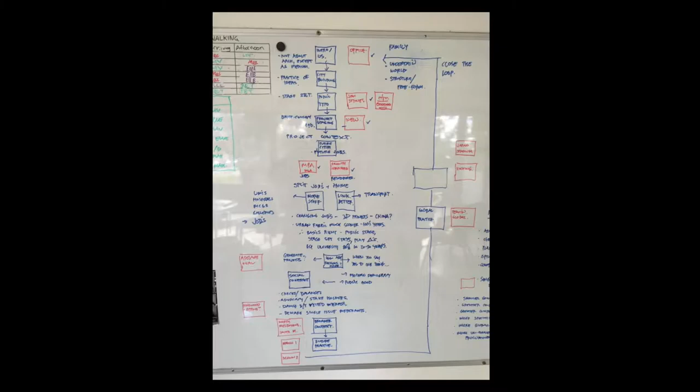One thing I wasn't going to show you, but one of my kids said to me on the weekend, Dad, you should show them that when you do the lecture. Just to prove it, we do actually sometimes prepare before we give a lecture or a conversation. So this is the structure I did on the whiteboard at home about what I was hoping to say, what I was trying to get across, and some of the evidence that we could produce. So we sometimes do put a little bit of work into how we structure things.

So I'll just step back a little bit about our practice and why we do the things we do. I don't think anyone will accuse us of having a style. We don't have a house style at Cox. We don't have lots of yellow sticks or whatever that identifies our work. But strangely enough, over time, you can start to see the clues of the philosophy behind it.

And that's my overarching message tonight: if you don't have a north point and a philosophical position, how can you continue to deal with such a constantly changing world and so many inputs that all architects are exposed to in the course of any particular project?

So the two main drivers that we like to focus on as a practice are about typological evolution, and we focus very heavily on doing different sorts of public building types. So we do convention centres, we do schools and universities, we do hospitals, we do stadiums, we do public work.

Railway stations in particular is a favourite topic of ours because it's actually a really great public events platform. And what we try and do is move them into the next realm. I'm not that interested in what the last railway station or the last convention centre was doing. What I really want to look at is what the next one's doing. So to evolve the type and to start to hybridise the type.

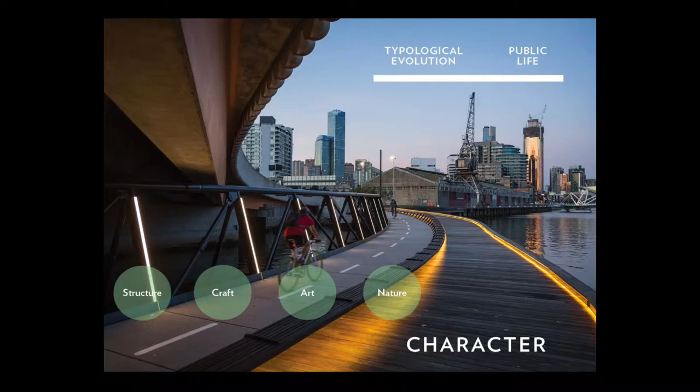We've got some more sort of complicated ways in which we describe that in terms of where is our north point, what is our ethos, what are our projects, how have we evolved them, and what are the processes that we do. But it's all driving towards what is a future city and how do they come together. And what's our role within that future city? Because we can't delude ourselves that the architect is someone all-powerful with a pen. But we are in a strangely influential position to start to influence the pressures that start to come upon how a city is put together.

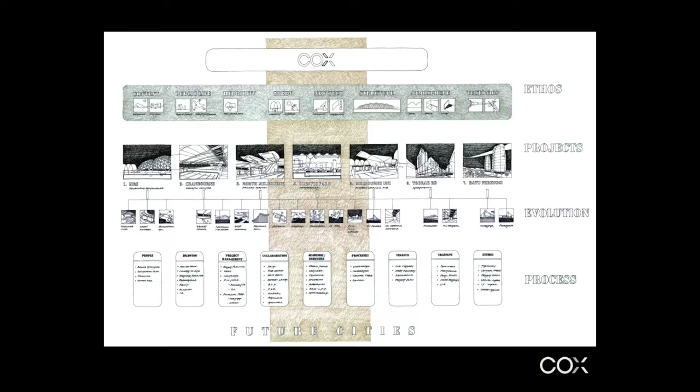Now, I presume you've all done enough of your professional practice to talk about the stages of the project. You know, there's the briefing stage, concept design, and all this sort of stuff. And this is all pretty conventional stuff. Interestingly enough, it's never quite the same for every project. So every project we do in some ways is a prototype of process as well as a prototype of project.

But one of the things I'd like to talk a little bit about today is what happens before the briefing. So public architecture for us is about what happens before the question is asked. How do you frame the question, how do you start to be involved in the debate about the question from which a brief, from which a project will come? So you have to go further back in sort of root cause analysis to really understand how public architecture comes about and what influence we can have on that. Because sometimes the influence can be well before a brief has come out. So we do need to start working our way through that.

And if you do want to start talking about future cities, you actually need to understand them at a demographic, a geographic and an economic level. We can get very tied up in our solutions, our answers, but in fact, we sometimes forget to look at the question that we're asking. So if you'd like to look at where future cities are going, you need to find out where the future jobs are. And that's not an easy question to answer. But if we don't understand where our future employment, where our future economic activity is going, everything else is just wallpaper.

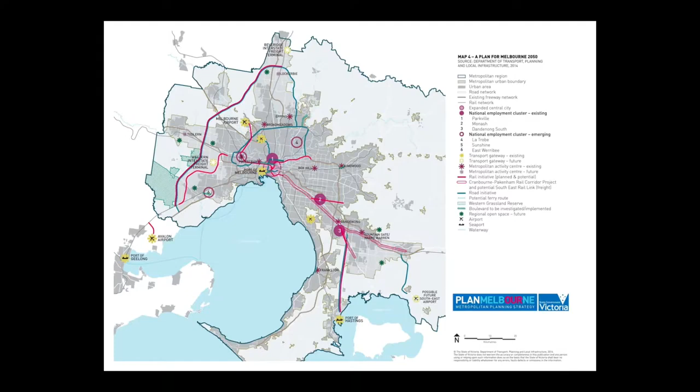So while that's all really good, what we've also done in the last 30 years in Melbourne in particular is that we've dislocated where our housing is from where our jobs will be. And it gives us an enormous problem as a city. Now, Melbourne's not unique in this, and in some ways we've got easy solutions to this problem in some cities in the world.

But the fact is that if you look at where the future growth will be from, over the next period of years, and all this stuff's on plan, it will start to show where our residential components are coming, and they're separated from where the jobs are. They're separated from where the majority of our schools are, and from where the majority of our health services, our sporting facilities. So what does that mean?

What it means is that it's a bugger to drive down to Geelong from Melbourne at this time in the evening because of the traffic. But it's a bugger driving around Melbourne, and it's a bugger driving back to Melbourne. The infrastructure that we have can't support the dislocation that we've created between where our jobs are, where our education is, and where we reside.

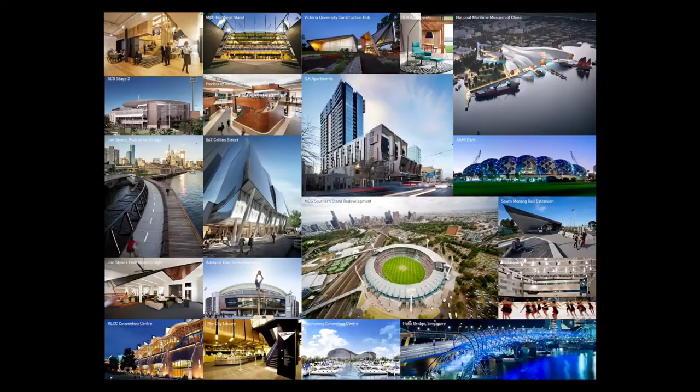So there's suddenly massive amounts of more vehicle movement per person than there ever has been before. And that creates some issues for us. And as far as we can see, that really starts to talk about two possible outcomes. The first possible outcome is build more stuff. All right, let's build more stuff where the people are. But it's such low density. How can you do that?

How can we support 5 MCGs in Melbourne? How can we support 5 medical research centres? We're supporting 2 potentially. Pretty hard to support 5. What do we do about all of the issues to do with universities? So the things that we need as a city can't actually be continued to be replicated. The city doesn't have enough critical mass and it doesn't have enough wealth.

So when you're an architect and being asked to design a public building, what you're being given is an extraordinary privilege. A society, and every culture in history has its own ways of disseminating this, but when a society says we wish to build something, and it might be a hospital, it might be a railway station, it might be whatever it is, it actually is also saying, therefore we won't build something else.

So every time you do something, it needs to work as hard as it can, and it means that there's some real onus upon the designers to make sure that we get it right. So the idea of building more is good, but it's actually not possible to build enough. The other answer, of course, is to build better transport links between them. Now, I think we've almost hit the end of the road.

Roads are very useful, we've got them, but every time we build more roads, I feel like we've got cars as quick as a wink. So how do we do that? And so one of the reasons that we love rail transport in particular is that we think that the stations themselves become a very important part of the link.

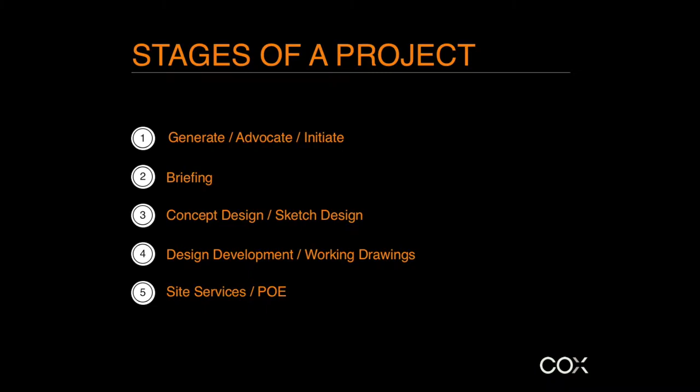And we got a knock on the door in 2006 from a chap who said, "Oh, look, I'm from the Adelaide Oval and got a meeting next week, and I don't think it's going to go very well, but it might go really well, and if it does, you'll never see me again. But if it doesn't go well, can you be my plan B?" We said, "Oh, okay, that sounds good." So we got a phone call a week later saying, "Oh, look, can you be our plan B?"

And we came to the conclusion that it was actually one of the prettiest places in the world. Unfortunately, it wasn't the architecture that was pretty. In fact, we had to point out, standing in the middle of it, that actually it was a pretty damned ordinary place, really. The delight was between the stands, the delight was the connections, the delight was its context, not what frankly was a fairly ordinary series of things around it.

So we then went through a process, and I'll go through this relatively quickly because this is a conventional public commission. We've been asked to get involved, we've gone there, we've made some comments, they'd said, "Oh, that sounds interesting, what can you do for us?" And so we got literal with the things that we felt were very important. What made that place Adelaide, not Perth or Melbourne or Los Angeles or Dusseldorf. There's something about that. And so we then ended up moving into what we called the Western Stand project.

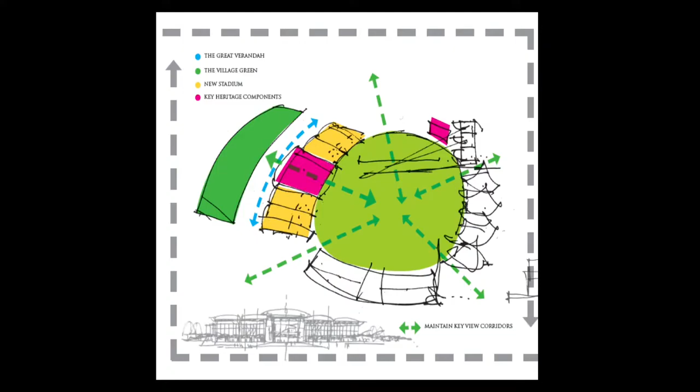And we looked at the ideas of pavilions. Pavilions were very important. And again, we talked about the Great Verandah, the Grand Promenade, the atrium, and evolving the structure of the ground itself and of the buildings. The pavilion really was the idea that there was a hierarchy. It wasn't a stadium. There were ideas of pavilions having gaps between them in the park. So you can start to see some of the early sketches about how what had been the Western Stand could change into a pavilionised structure that really has a centrepiece with some hierarchy.

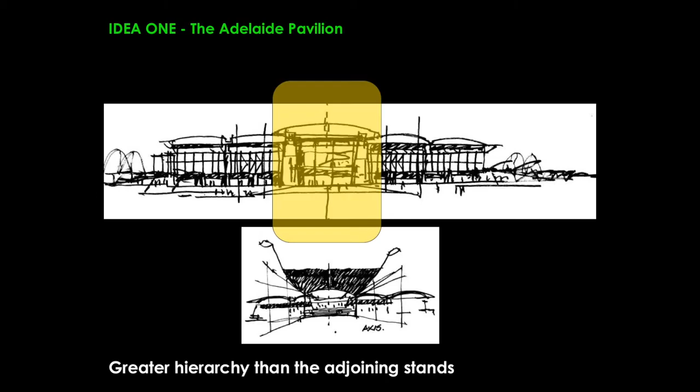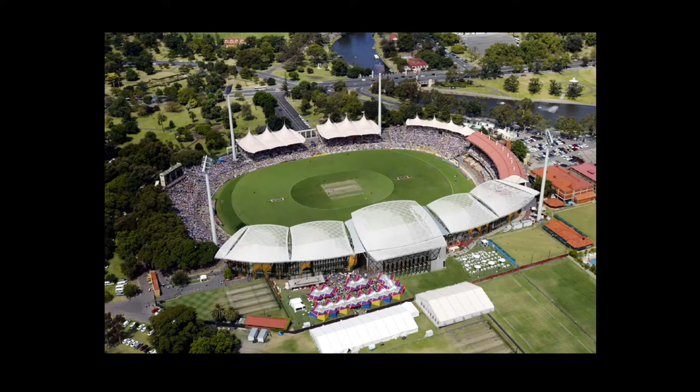The veranda being a place where, in Adelaide, in cricket, it gets bloody hot, 40 degrees. You don't want to sit in the sun. The idea of the veranda being something that is able to mediate between inside and outside in an environmental sense, but also being the stage set where that social act happens, and so we line the outside edges of the buildings with veranda. And again, the idea of shades, moving fans and so forth. Looking at the vaults that existed there.

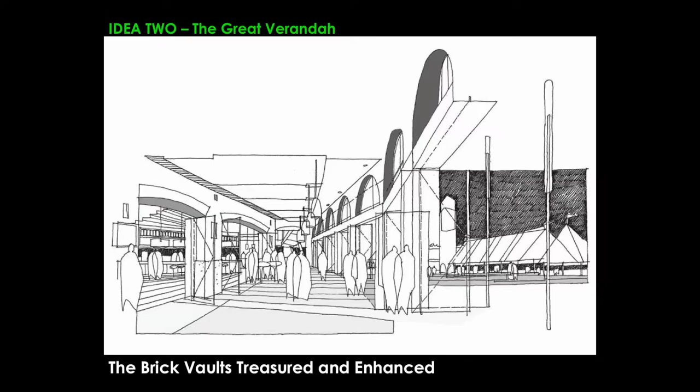The Grand Promenade, something we'd never seen before actually, which is that because of the history of the ground, there's actually a promenade that you can walk around here.

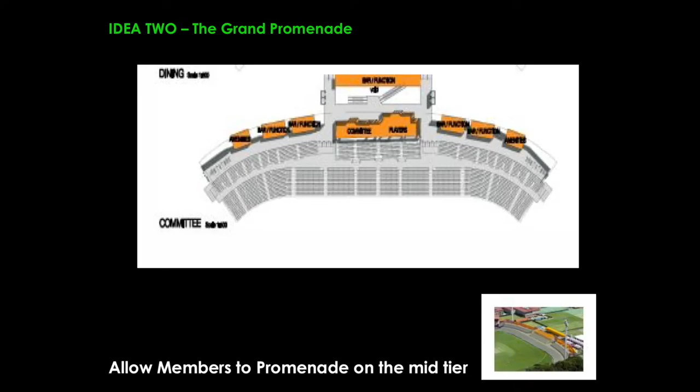And what happens is that there's 30,000 people come into a stand that only had 10,000 seats, and all had a lovely time and had a party in the back, a bit like at Flemington racecourse, you know, have a party in the car park, never see a horse. And what people would do is they'd do the odd circuit through here, and they'd see all their mates and they'd make a time and a place to meet each other in the course of a day.

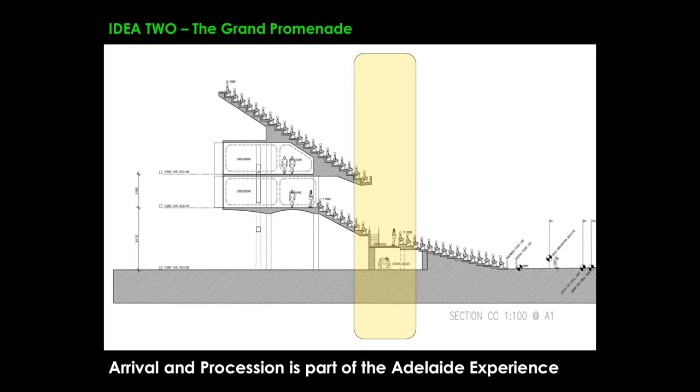So it's actually quite a special thing to do. So you've got to understand the social structures of it. And so we continue to let that occur. And the atrium itself really was about trying to provide that sort of mediated sense in the middle and through here that looked after the old building and also put forward a position.

So that was the Western stand, and you're thinking, oh, that's pretty conventional. You know, it was a lovely thing. It took us around 3 years, I suppose, between the front and the end. And we're very happy with the outcome. But then things started to change.

And is anyone here from Adelaide? You've lived there? Yeah. How long for? Went to high school and uni. Right. There, and a few years after that, so probably at least 11 years. 11 or 12. How do footy and cricket get on? Sorry? How does football and cricket get on?

They don't. No, exactly. So what happened in Adelaide was football and cricket hate each other's guts. It's hard to imagine from this distance, but it's the Hatfields and the McCoys. There's reasons for it, and frankly, probably quite good reasons, but I won't say more because of defamation laws. But football had been kicked out of the Adelaide Oval 40 years ago, and they'd been fighting each other ever since. And they had carefully built themselves a pretty dismal place out at West Lakes called Football Park, and the Adelaide Oval stayed home of cricket.

And they had been caught as a city, not clever. You've got 2 decaying venues, you've got 2 declining audience participations. Even the mad South Australians have finally got sick of going out to Football Park. The attendances were beginning to plummet. They sold plenty of memberships, but no one would want to go there because it took an hour in the car and it was crappy when you were there. Spend an hour in the car park trying to get out of the place again.

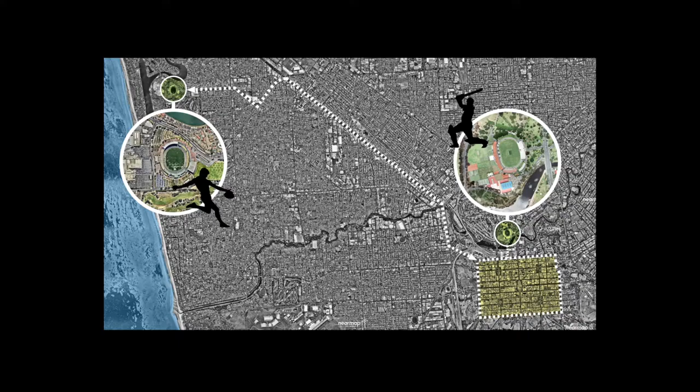And the Adelaide Oval itself was delightful in its gaps, but decaying around its space. And again, 20 people would come to a Shield match. It's not exactly right. So the smart thing for a city to do is actually to combine them together, just like the MCG does. But we've found it very difficult to do that. And so in terms of how does a city go about doing that, neither of the heads of those 2 particular codes could be seen to be talking with each other because that would be seen to be a betrayal.

And so we ended up getting a black commission, if you like, where we had to see whether or not we could get 50,000 people around the Adelaide Oval and not ruin the ground. That was literally the one-liner commission. And so we did a black ops operation to see whether or not we could do that and whether or not it was possible to keep the integrity of the Adelaide Oval intact while we beefed its population up to about 50,000, which is the same as Edinburgh.

And we ended up having secret meetings at airports. Literally, people weren't allowed to fly into particular towns. We ended up with a meeting with the South Australian Premier and Treasurer in an office in Melbourne because they didn't want to be seen in South Australia to be talking about this with anyone. And it actually happened. But it took a lot of time and it took an enormous amount of effort relative to having to get football and cricket both to approve that.

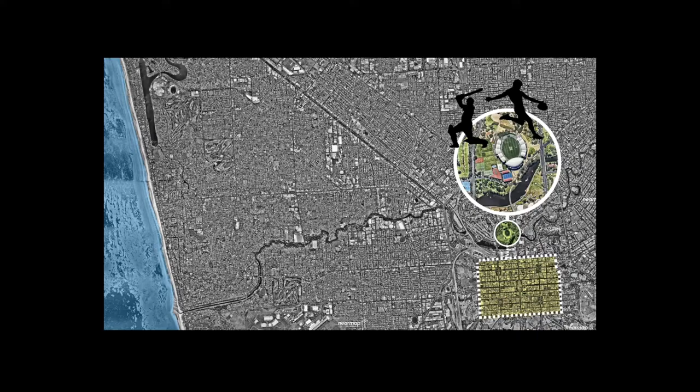So we would do things such as go on 1-week road trips through rural South Australia, presenting 3 times a day at the local cricket club, at the local pub, lunchtime at the bowls club, to all of the members, because we had to get more than 75% of the members to vote in favour of it to occur. And we got that. We got 80%, which I didn't think we were going to get. Idi Amin didn't get a vote like that when he was rigging the election. So it was actually fantastic to be able to do that. And what it's meant is that the reason it got up is that we were able to advocate for a better city as a result.

And if anyone's been to Adelaide since the Adelaide Oval was finished, it has had a transformational impact on the city. And it's not because of the architecture. I mean, we like to kid ourselves about it, of course, but I actually think it's because it's about the urban context, the fabric and the belief of the city. Of course, you build the world's best event precinct, 5 minutes walk across a bridge from the main railway station in the city, in the middle of a beautiful parkland with all sorts of shops and laneways and so forth. It's great. The city comes alive.

And so instead of getting to the ground being a real problem like it was at Football Park, what happens now is that the football clubs all have emissaries out at the railway stations. So when you get to your Gawler railway station, there's already flags and people are handing out and selling footy records. The game has started. You come into town. You can stay there afterwards. Perhaps you take someone who doesn't want to go to footy and they go and see a movie. You catch up and have dinner afterwards. So it's actually changed the way in which people attend those events.

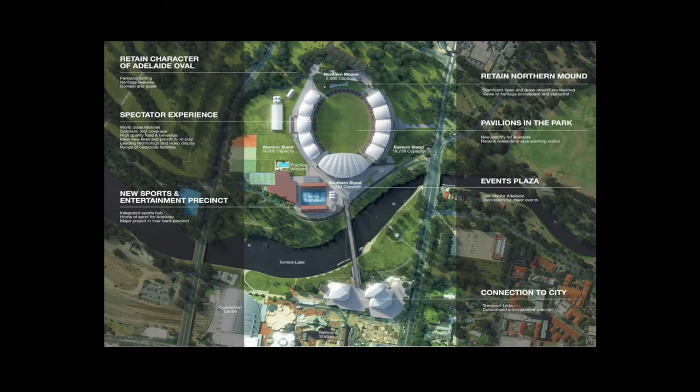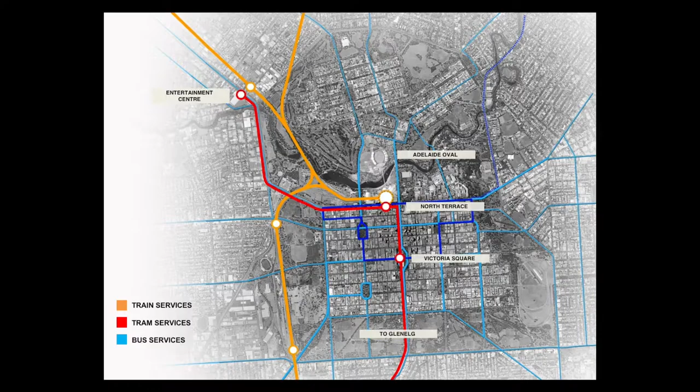But what's even more important is that it's changed South Australians' view of public transport. Hey, getting the train to the footy on Saturday was pretty good. I might catch it to work. So it's actually transformed the attendance of public transport within South Australia. And so, look, I'll very quickly go through. You guys can probably see this quicker than I can describe it: where would you put a 50,000 seat venue in South Australia? Funnily enough, you'd put it within 500 metres of the best public transport in South Australia. Of course you would. You wouldn't build it out in the boondocks. You'd put it where the transport is.

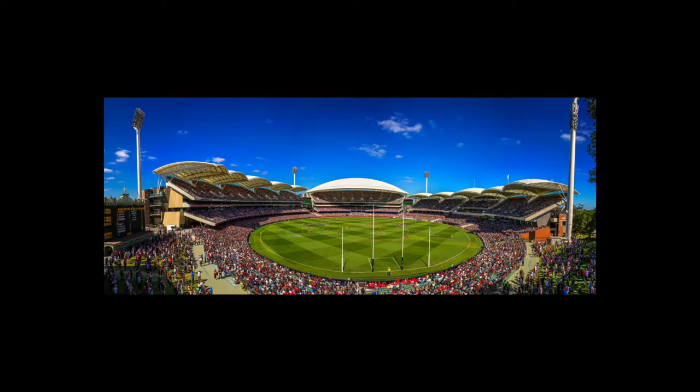You'd make sure it was uniquely South Australian. You would make sure you retained the positions of the critical components of the ground itself. Everyone loves the North Mound and the Moreton Bay Figs. Well, we gave them more North Mound back. That's an important thing to do. The heritage scoreboard has been enhanced. And the idea that there's now a series of pavilions still around the park actually works quite well. And so, for some reason, it just goes off.

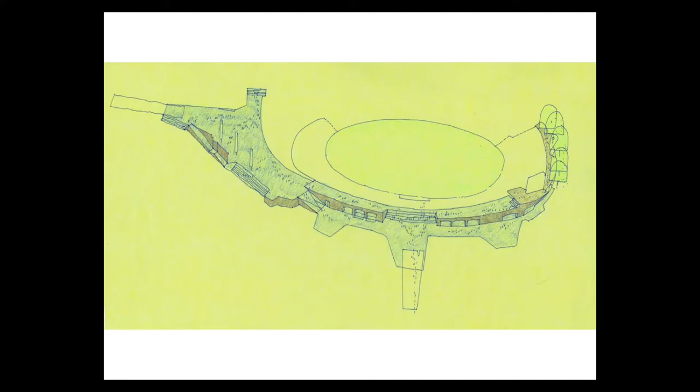So public architecture is not about the assemblage of the architecture. That's a skill that we all should develop, and we will continue to develop. But you need to try and understand the things that drive it. So our ability to turn it from a Western stand into the Adelaide Oval really comes down to the ability to draw, the idea of making place, ground plane. It's not just a stand, it's a whole series of places that people can go and inhabit. The idea of those delightful sails and the pavilions over the top of them, and it works really well. You can now have drinks among the Moreton Bay Figs.

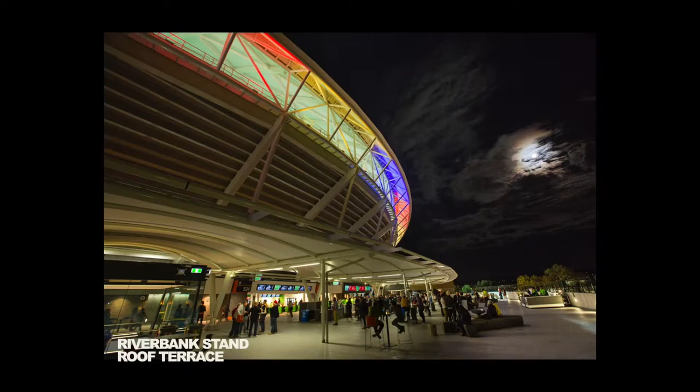The arrival into it from the Riverbank Plaza. There's a roof terrace up there. We argued for a roof terrace. No one understood the roof terrace. It's a public dining room. We managed to convince them to spend the money on a concrete paved area instead of a tin roof above the dining room. It took people 3 days of the first test match to work out that it was there, and it sold beer. And so they ended up with a real problem halfway through the third day where it had hit capacity.

They were about to be in breach of their building approval because there were too many people there. And I said, we've got to shut it down. This is a disaster. And this was very clever, one guy who was working on the bar said, don't shut it down, just reverse the escalators. And they did. And suddenly it was able to be managed. And they sold more beer there that day than they have ever sold underneath the scoreboard, and the bar under the scoreboard traditionally has been South Australia's best-selling pub.

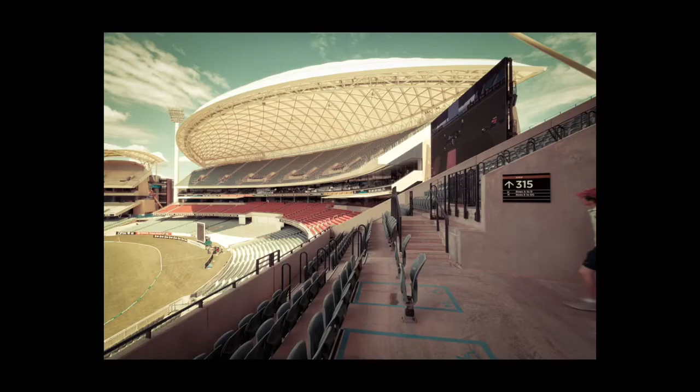And so the idea that there are particular rooms that overlook, for example, like this cathedral room that really sort of honours that view, how people come in. The purpose of today is not to bang on about the ideas per se, but the Mayor of Adelaide's there. But the idea that there's a whole series of spaces which you can occupy, you can come together tribally. This is an image that was sent to us from someone. So people are sending us their favourite photos of the Adelaide Oval.

Within a couple of hours of the Charlie Hebdo attack in Paris, this came up in the tricolours. So they said, hang on, we want to actually support France in this sense. And so the way in which the South Australian was able to do that is they converted their southern stand into a tricolour support for France. So it's very literal, it's very simple in some senses, but there's also something fairly fundamental about how your public buildings should be able to express more than just the sum of their parts.

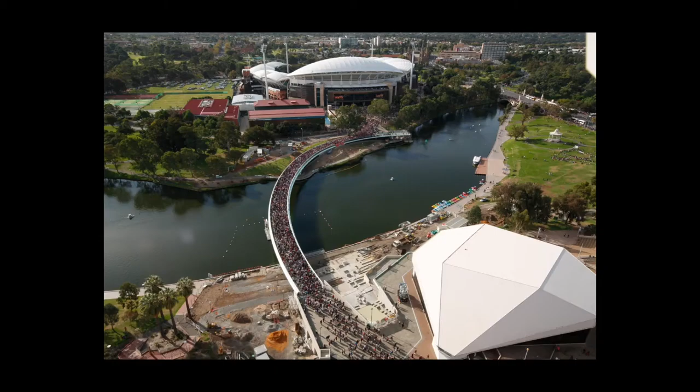I think I've spoken about the urban regeneration, of course, and of course the Rolling Stones, when they finally did get there. One of the guys who helped us put it together from government got a couple of tickets, and he was pretty excited. This guy's a senior public servant. When I say he's sort of 65, he looks about 75. But he's a terrific guy, and there's a real driving force behind him. He got quite excited about it when he was there. And so he texted his son, who's in his mid-40s in London, and said, oh, look, I'm at the Rolling Stones concert. I think I'm the oldest bloke here. And his son texted back and said, Dad, have a look at the guys on stage.

So it's about being a city venue in that sense. And in some senses, it's not about the architecture, it's about the social contract. People gather because they have a need to exchange a social contract. We're very social animals, and we need good spaces for that to occur. We need to feel secure. And so in that sense, public work does need a context. And so, again, the power of advocacy.

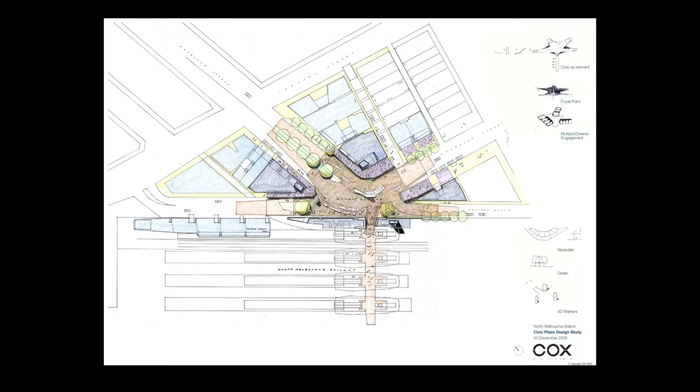But even that has a context, and so we spend as much time outside the station, drawing and advocating for stuff that has never happened. But it means that the reason that this concourse is here is so it can stitch back into the fabric of North Melbourne, as seen from the old concourse, which was at this end, and actually went from nowhere to nowhere. So the idea of having a future position is really important in how you put some stuff together.

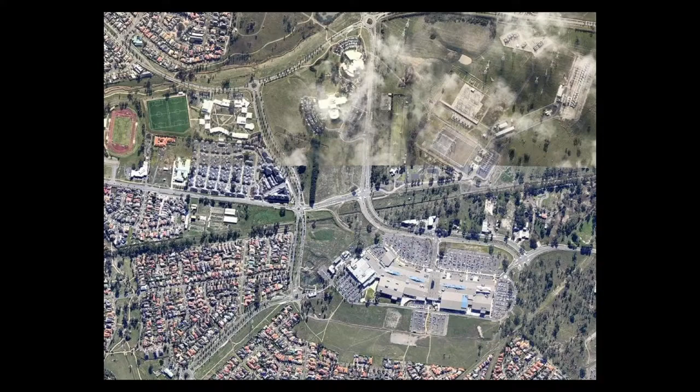So what can they have? How can we start to transform a place which we're going to put a railway station in? There's no structure plan. And so we ended up having to do a structure plan on the fly without a commission. So we ended up just drawing one so we could make sure that any station building that was put through could address future growth within that area. And so we started to say, well, look, if the station's probably about right here, it actually becomes a position that's on the fulcrum between the retail and cinemas in through here and up into the town hall and performing arts precinct up through here.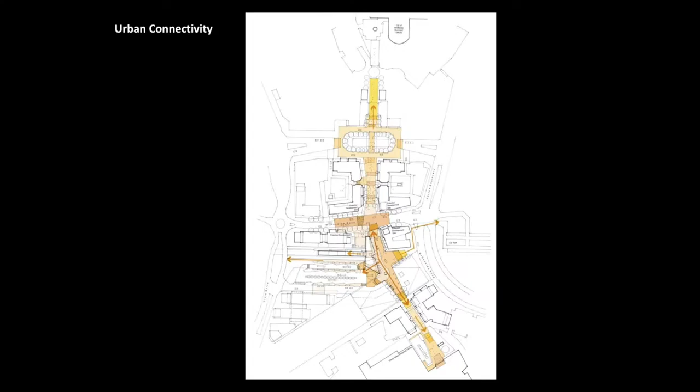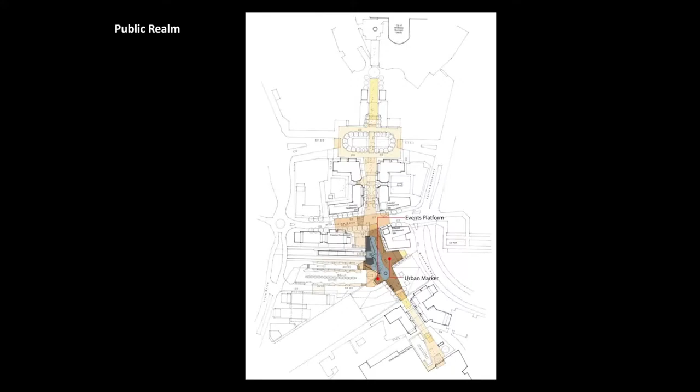But there's actually a structure of urban connection that we need to start to think about. How we can start to get multi-modes like bus, tram, rail interconnections and so forth. We talked about that being a significant piece because it's going to set the standard for what happens in that urban corridor. The idea of the shelter in through here. The idea that obviously landscaping needs to come together, and the idea of what future opportunities there are.

So we've already started to identify half a dozen different sites that we can start to build something. It won't happen as part of this project, it might happen in 5 years or 10 years, but it can happen. So you make sure that you allow for the sites themselves to be viable so they can actually start to generate urban fabric in the long term.

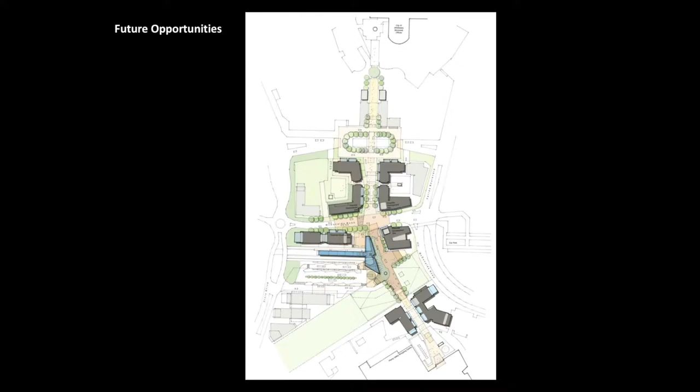The bits of Melbourne or Geelong or wherever you are from that people like tend to be the older, more established areas because there's a density of occupation there before you got stuck in such planning regimes. And so we ended up doing what we call the precinct plan for 2030 and away it went. Day one was fine, but it's important that we know that day 30 will be as fine as well.

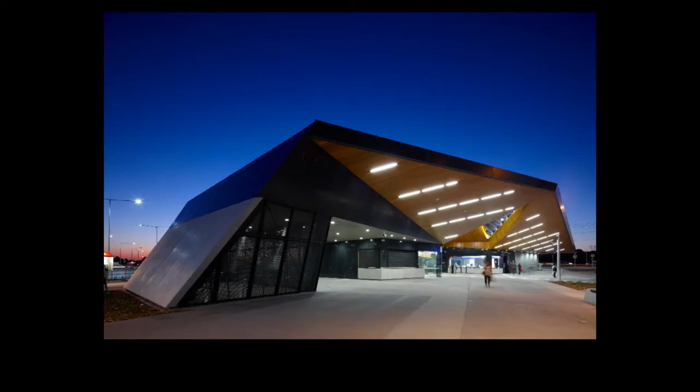And so this is just a couple of images of that. Again, the idea that there's very clear lines of sight. It's secure. One of the things that we like to do is make sure that people at night can start to feel secure there. So the way in which they're structured is quite important.

Can you go back to the slides, back to your last one? These large buildings in the centre here, what uses are they? Are they office buildings or are they mixed use? What's the situation? I don't know. There was no brief. It wasn't even our land. That land had been sold by the council to Lendlease, and then Lendlease sold it back to the council and it reacquired it.

There was no brief. We just wanted to make sure that those buildings have very habitable floor plates. So between about 18 and 25 metres wide, they could be useful as residential buildings, they could be good as commercial projects, they could ideally have some form of retail or engagement or active edge at the bottom. But we don't know.

Do you advise the council or whoever's driving this on what they could be, as you said earlier on, about trying to mix things up? Push with the council saying these should be mixed buildings so that we get that. Yeah, we do that, and in fact, in this particular case, there was the Department of Planning, effectively the state government's planning agency, there were the transport planners, and there was the city council, all around the table, saying, oh, right, now we know what to do.

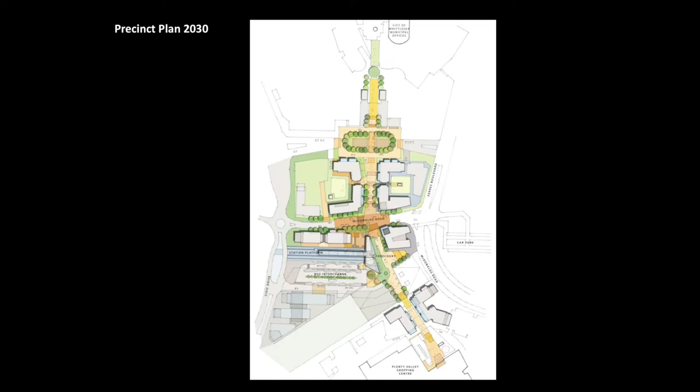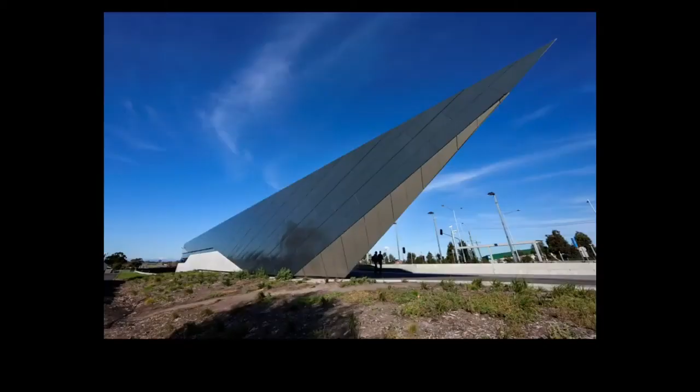So here we are. So this is just some images as it was. Another version that we did further down the track. You'll see that some of the language was the same. And this is at Thomastown. And again, at Thomastown, we advocated for a new railway station to be built and gave them reasons why it could, and they bought it.

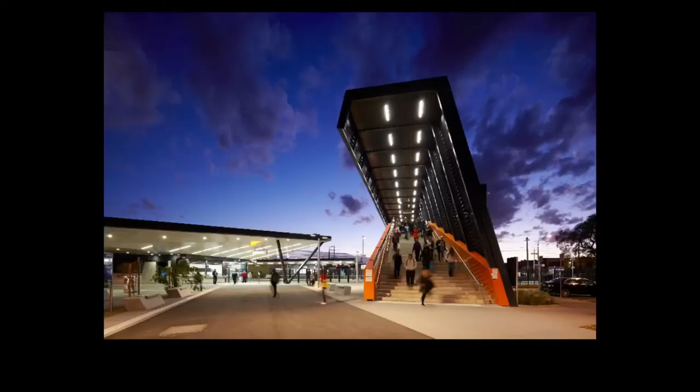And so Thomastown has a new railway station because of the process that we went through, including this sort of urban link that tried to stitch across the rail corridor. So, again, a civic gesture, as Des says. And again, some of our good public work doesn't involve building at all. And so we do quite a lot of master plan and concept work.

Again, most of this never sees the light of day as a finished product, but that's the nature of it. Everything's provisional and transitional, but the idea of creating place from a combination of existing fabric and new insertions with a bigger idea over it is really quite compelling as an activity.

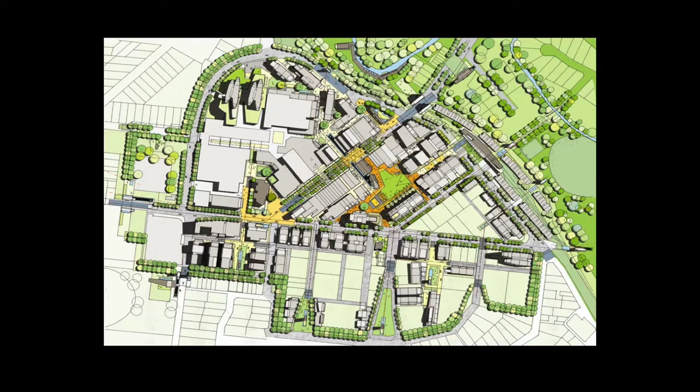So I'd better just watch the time. So in that sense, there's a range of ways in which we think architectural practice is going to change over time. It's changed dramatically in the last 10 years. I think the next 10 years will bring us more rapid change than ever before. But I won't go through some of the things that we talk about here, except to say that working out of your own hometown is going to become more and more the norm.

The fact is Australia is a developed country. We actually already have an MCG in Melbourne, for example. We've got a reasonable rail system. We've got hospitals, and yes, there'll be continued work, but there are parts of the world that are growing so extremely fast with virtually no infrastructure that the need for these design skills exists more outside Australia than it does in Australia.

So we might be working on the Christchurch Justice Centre in New Zealand, for example, as part of that rebuild, but in effect, the thing about future cities is that the world is urbanising so fast that the need is one of the few things we will be sure about in the future. And so I'd like to talk more about what we do outside of home cities, because people are travellers, people are traders. We've been doing that for millennia. It's how we move, and the question is, what does it mean to work outside your home city?

I'd been to Adelaide for a weekend with Fiona 30 years before the week I spent there to do the Adelaide Oval. So you can't rely upon knowing everything when you go into a city, but it's a remarkably audacious act to go into a culture that's not your own and offer an architectural solution. It's something you need to be very careful about.

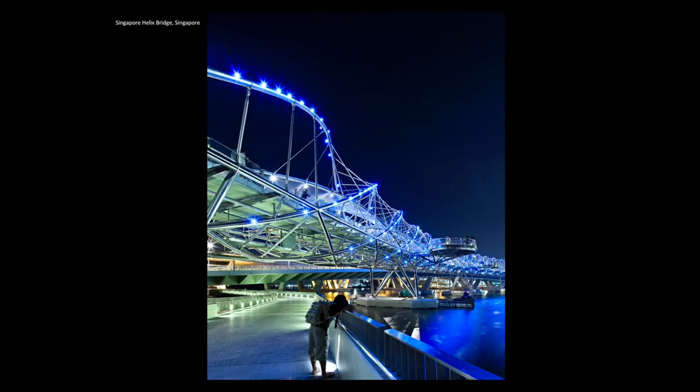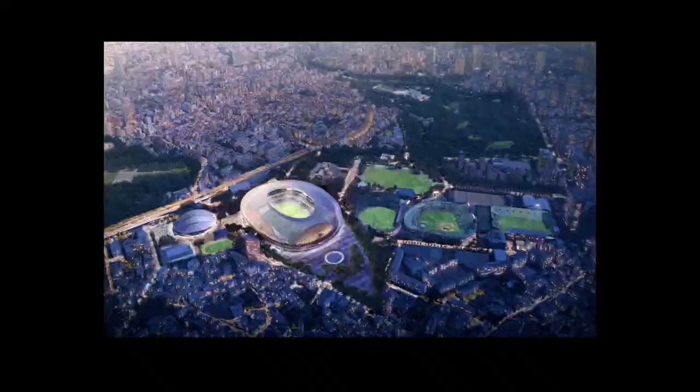Yes? Is that the one they said that they want to build? Zaha's one? Yes. Yep. So she and the Japanese government parted ways about a month ago. Yeah. Any reason for that? They're not sure how they're going to procure future work. So we're having some conversations behind the scenes, but that's as far as it gets at this stage.

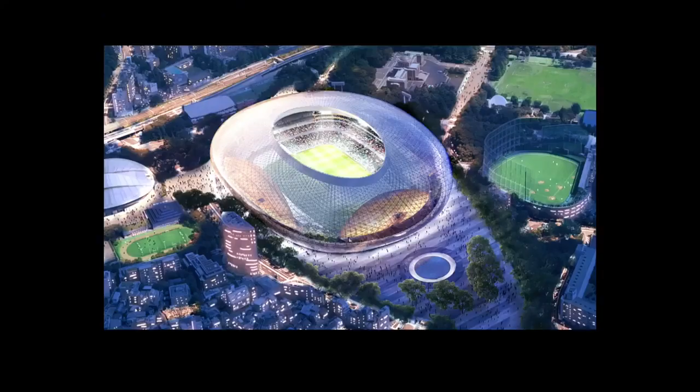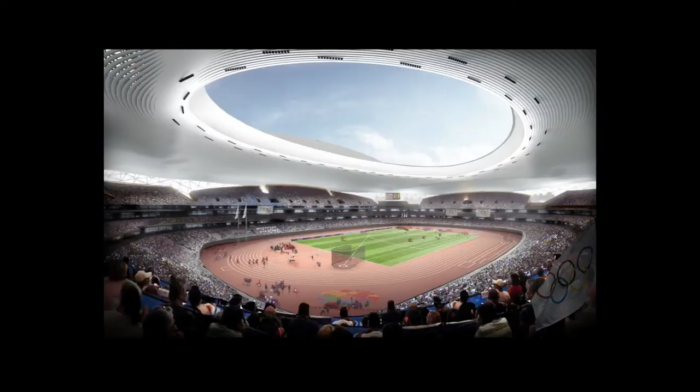So the idea that there's really some beautiful timber pieces gathered inside this glass prism, this sort of pristine prism, for people to come together. Again, a very, very simple concept, and one that we'd like to generate at some point. But again, when you're in the world of public architecture, you do 10 schemes for every one that gets up. So you've got to be an optimist to do it.

But this is, if you like, a typical example of what people imagine is a sort of heroic thrust of global practice and so forth. It's actually not like that at all. It's very personal and it's very intimate, and it requires, you know, very small groups of people putting intelligence and enthusiasm to the task in a very careful manner.

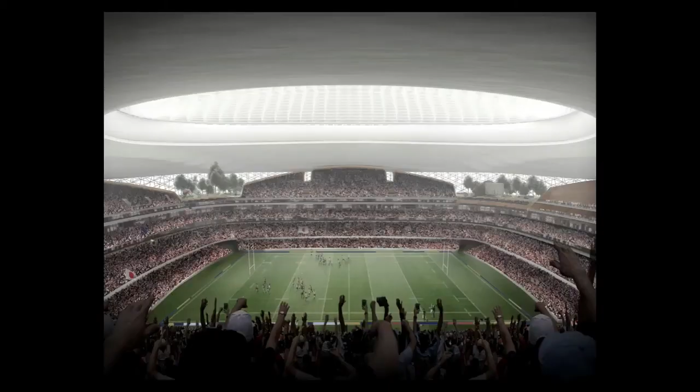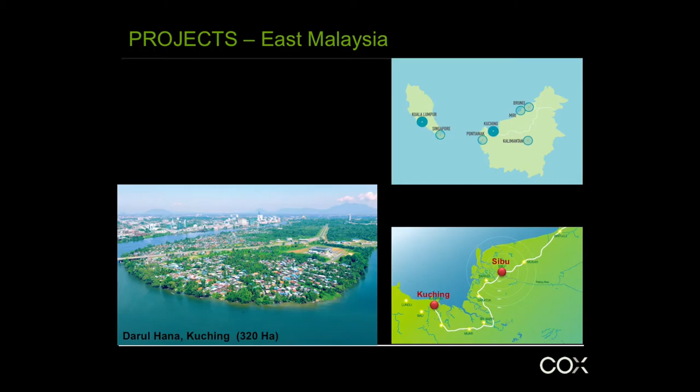It's almost like a refugee camp in some senses where people have come and gathered. And the culture is always to welcome family in, so as families come into the city, we've got 9 families, for example, living in a two-room house in there, and twice a year it comes through waist high in the floodwaters. So this is the site itself, and again, I won't convert this into a planning lecture per se, but it's a pretty audacious request to have happened.

We had some people who had organised to come in and see us in the city. Patrick and I had a number of Chinese delegations through, and it's all a bit turgid, to be frank. And anyhow, we had this group from Borneo, and we sort of rolled our collective eyes and gone up to have a chat with them. And there were 14 people, they were all much better dressed than we were. They spoke better English than even Patrick or myself. In fact, 50% of them had PhDs from places like Oxford and Texas and Adelaide and all over.

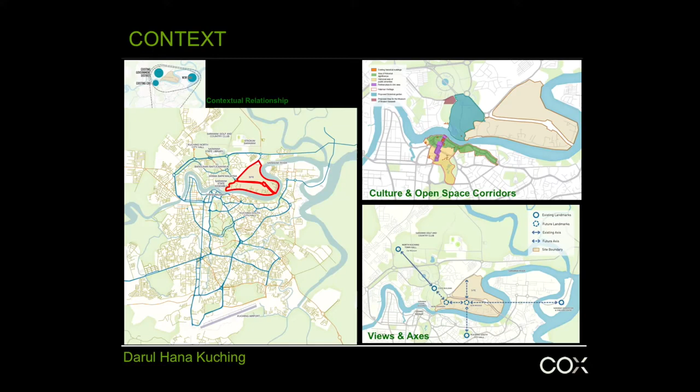Very erudite, very focused. They knew what they wanted to do. They had done research on the residents in this area. They interviewed every single one of the 15,000. So they knew exactly what they were dealing with, and they were desperately searching for some ideas on how to engage what they were telling them they wanted with what they needed to produce.

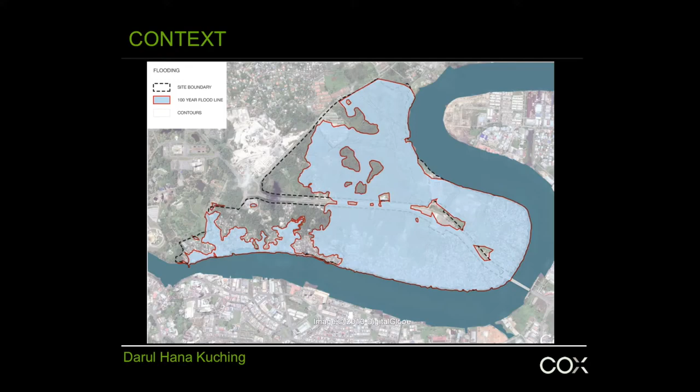So without going into it, you can start to see just how, I mean, everyone's terrified of flood in here. It just wiped out the lot. So everyone was very worried about how that could start to come forward. You can see where the flood inundation is. So that's the site, and bingo, not a good place. Workshops, you know, working up schemes live around the table.

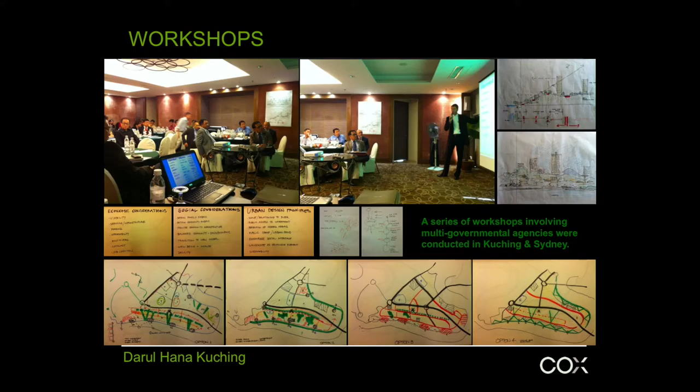Dealing with the culture of a workshop in Malaysia is very different from the culture of a workshop here. I won't go on about that. I can continue to talk about that. The ideas of the various structure plans and how they did come together finally. Where again, starting question: where are your jobs?

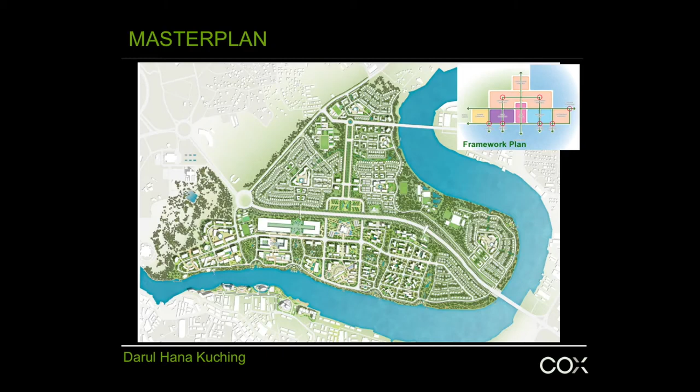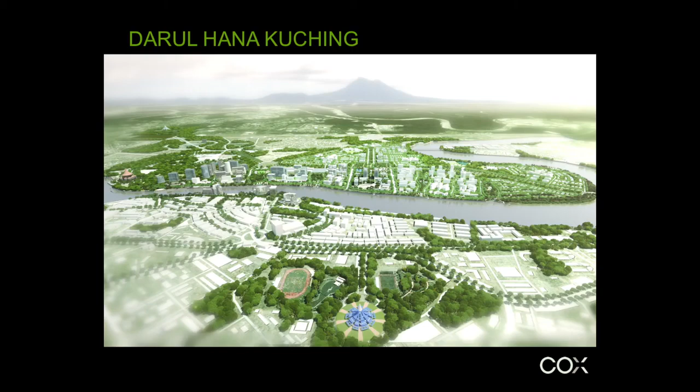You know, one of the sub issues here was great unemployment, lack of education, dissolute youth, and so forth, growing crime rates, and so forth. So start to look at all of those components. But one of the real issues for us was how do people want to live? In that sense, everyone refers to the kampungs and how delightful they are. And so we spent a lot of time talking with people about what the kampung was.

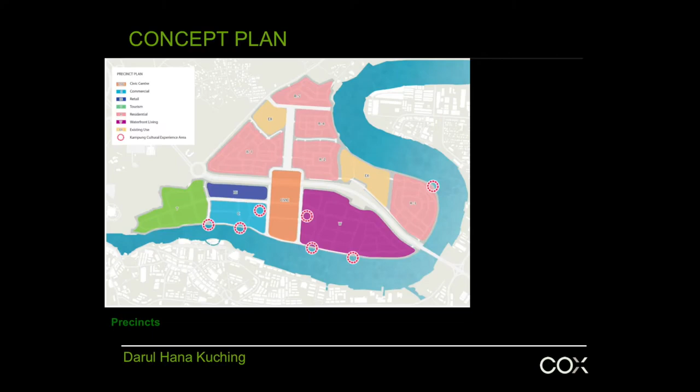And the kampung is an incredibly delightful way of living. It's just fantastic. And so this is a traditional village, if you like, in Borneo. But of course, what they want is they want to live in a kampung. They don't want to pay for it, of course. By the way, I've got a 4-wheel drive and, you know, internet access and a satellite phone. So I need to be able to lock the door and leave because I work in KL every second week. So there's a real disparity about how you deal with the contemporary and the historic, if

you like. And so again, a bit like the Adelaide Oval, we looked at the attributes of this as distinct from the architecture of it. The idea of what that meant as an urban village, how it was very responsive to their particular sites. They had tuned them relative to how they came. The idea that there is a centre and facilities where people gather around and come into a central whole. The idea of connectivity is important. And within the housing themselves, the idea of the structure of arrival and approach and a series of layered places into which you can move from the public to the private.

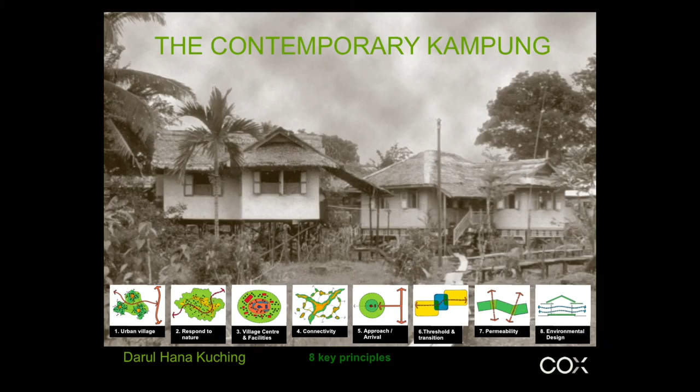And there were all sorts of key indicators that you wouldn't know here about what forms your place and what forms my place. And it could be a post or a stick or something that's understood by everyone that it's so-and-so's place on the other side of that. But the idea of that threshold and transition, the permeability and the environmental design and so forth. And the idea really being that we could start to come up with a whole cascading series of scale and also a cascading series of the relationship between public and private.

And so the idea that there would in fact be a neighbourhood centre where jobs could be undertaken, they would have their surau there, and the idea that that's their public centre space, and then moving out into different forms of housing that allow different family units and how the evolution of the family unit changes. So you might have a couple, they may have children. What happens to the grandparents? Suddenly the kids have children, and on it goes.

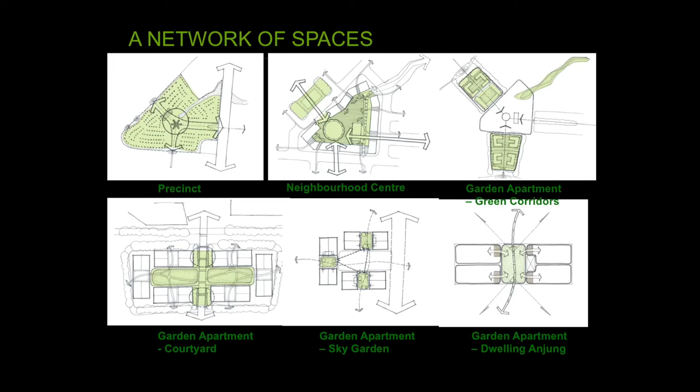And so the ability to expand and contract the living space, and also have a series of thresholds into which, as family gets more and more intimate, you can start to be invited further into the threshold of the houses. And so that idea, if you like, is more to do with what we would describe as a contemporary kampung, as distinct from trying to do a thatched roof and work out where we're going to park the four-wheel drive. And so we ended up with the first stage really as being the village centre in through here, and then a series of different housing types to match the different requirements coming through.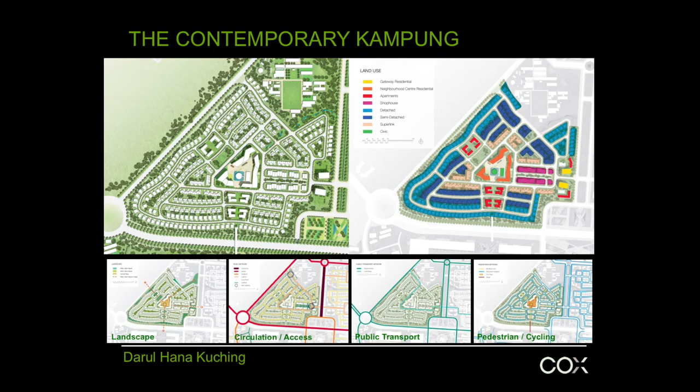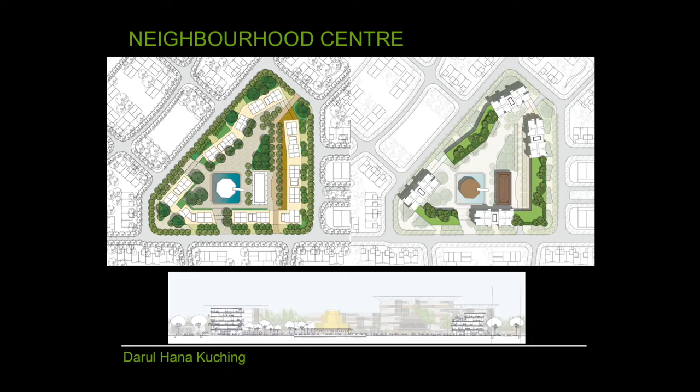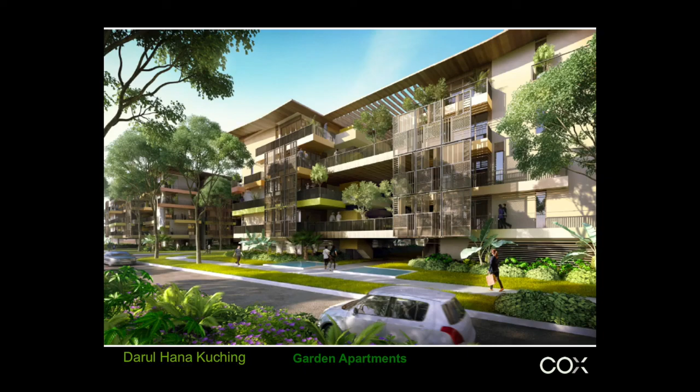And again, very, very early day stuff. It's not designed, it's still an idea, but we can see how that idea can start to deal with multiple use of levels, the idea of an active ground plane, inhabited spaces, private, public, and a whole series of transitions between public and private. And then, of course, how you start to advocate that and the public processes that you need to go through to get approvals for this and so forth. So it's a very time-intensive and very delightful thing to do.

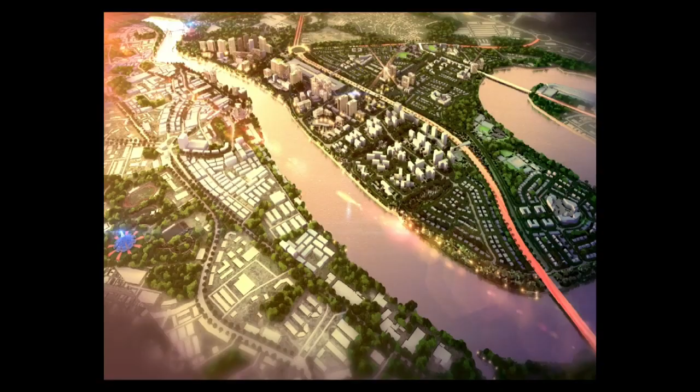But that's sort of the full circle in that sense in terms of what it means to be involved in public architecture. It's less, in our view, to do with the architecture, not because that's not critical, it's our secret passion. We often need to use sort of furtive means to get a good project up, but it's actually about the city and the social constructs and understanding those, so you can then produce a building that has the meaning and responsiveness over time that the city really needs.